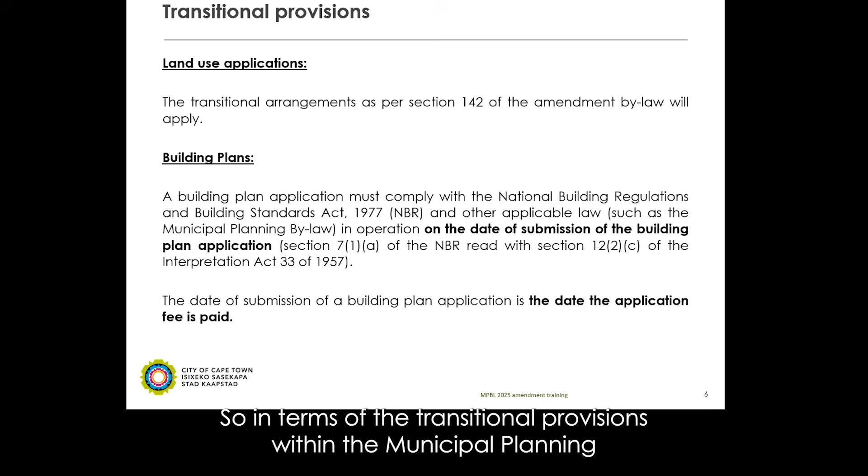So in terms of the transitional provisions within the Municipal Planning Bylaw Amendment, the transitional arrangement for land use applications is as per section 142 of the Amendment Bylaw, and that will apply going forward. With regards to building plans, the building plan must comply with the National Building Regulations and building standards and other applicable law on the date of submission of the building plan application. The date of payment of the building plan is the date considered the date of submission, and the law applicable on the date of payment is the law that will apply to the run of the building plan application.

Following on from this, there are a few iterations of how that can proceed. A building plan application submitted before the amendment of the Municipal Planning Bylaw, which will come into full effect on the 1st of October, must comply with the pre-amendment provisions of the bylaw, even if the building plan application is decided after the amendment comes into effect. So if you submitted before the 1st of October, the bylaw applicable at that time will be in effect on that building plan, even if it's decided after the 1st of October.

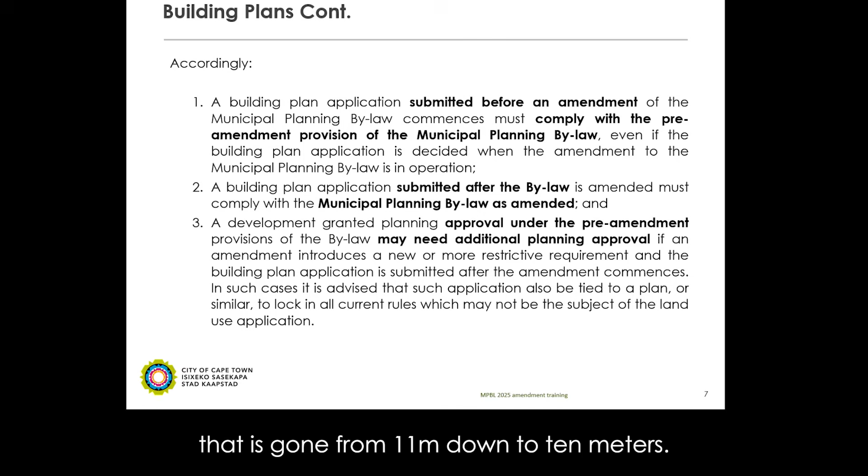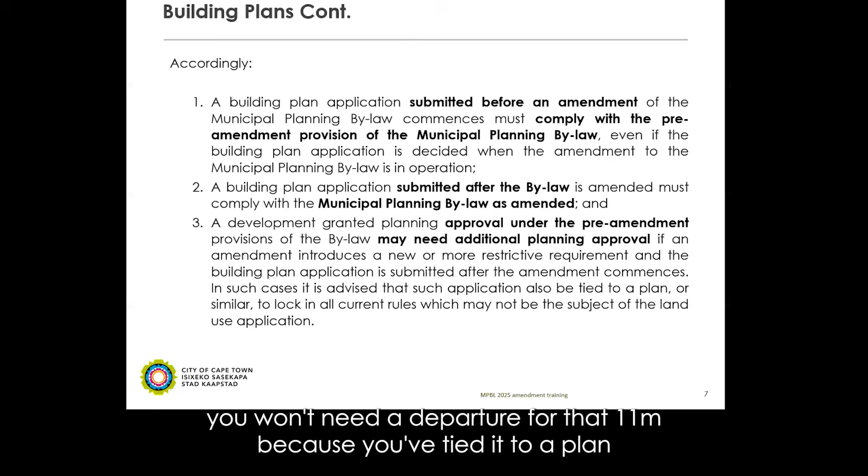A good example, as we will speak to later, is one of the development rules which has changed: our residential one height, which has gone from 11 meters down to 10 meters. So if you have a land use application approved before the 1st of October with a height of 11 meters, and we tie it to a plan showing 11 meters, you will not need a departure when your building plan is submitted, even though the new development rules after the 1st of October go down to 10 meters. Because you've tied it to a land use plan, all the development rules tied to that plan will then apply going forward with the building plan.

So moving on just to the objectives of the amendments.

In an overarching look at the amendments, the objectives include alignment with applicable approved city policies and strategies which have changed over the 5-year time, as well as since the last amendment.

A big direction that we took with this bylaw amendment was avoiding duplication of processes. This can be seen in things such as events, filming, and informal trading, where there's duplicated municipal processes which we then just try to remove.

Expanding and recognizing economic opportunities can be seen through the expansion of our TR2 zone, and expansion of renewable energy opportunities. There's been a long list of new land use types included in this bylaw, improved emergency housing - we've made it clear that this is now temporary disaster housing provisions - incorporation of affordable rental flats as a land use category, new incentive overlay zones, a new rectification chapter, and new impoundment powers for movable and immovable properties, including vehicles, for illegal work.

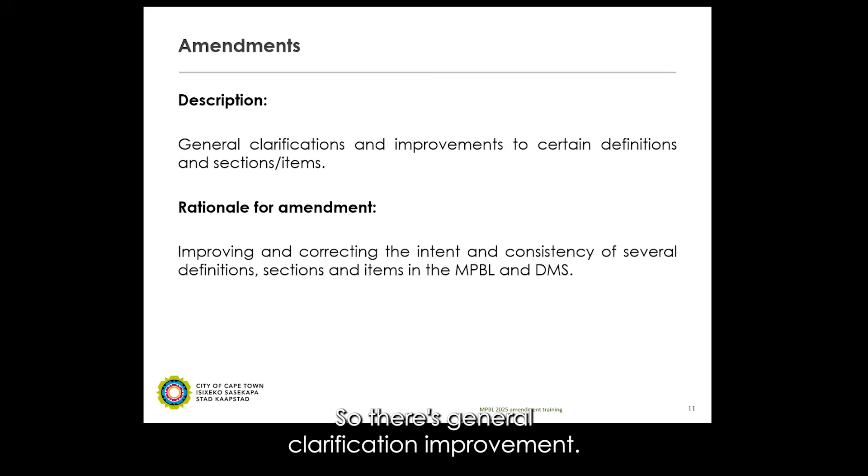So just going through each one of those, the rationale behind them. There's general clarification and improvement to certain definitions. The rationale for these was just improving and correcting the intent and consistency of the definitions.

The improved emergency housing, or now temporary disaster housing provision - the rationale for this amendment was that in disasters like a major fire or flood, the city is obligated to create temporary housing on land that can be zoned for such purposes. The intention of this amendment was to make sure that it must be temporary in nature.

The incorporation of affordable rental flats - this is a recognition of a phenomenon that is currently happening around the city, and now we are trying to control this phenomenon in a manner that can assist the living conditions of the people using it.

Just to highlight again, those components are of course already effective now. The affordable rental flats from the 1st of September.

Enabling economic opportunities, as I said, creating and recognizing new definitions, promoting economic development in terms of land use possibilities. One of the big ones was outdoor restaurant seating within our TR2 zone.

Eliminating duplication of processes - eliminating the need for land use applications in full in instances where the city already has mechanisms in place to regulate these functions. As I said, filming, events, and informal trading all have their own separate processes and bylaws. There's no need to duplicate it, so we found that removing it from the land use section is an effective way to make it a more efficient process for these phenomena.

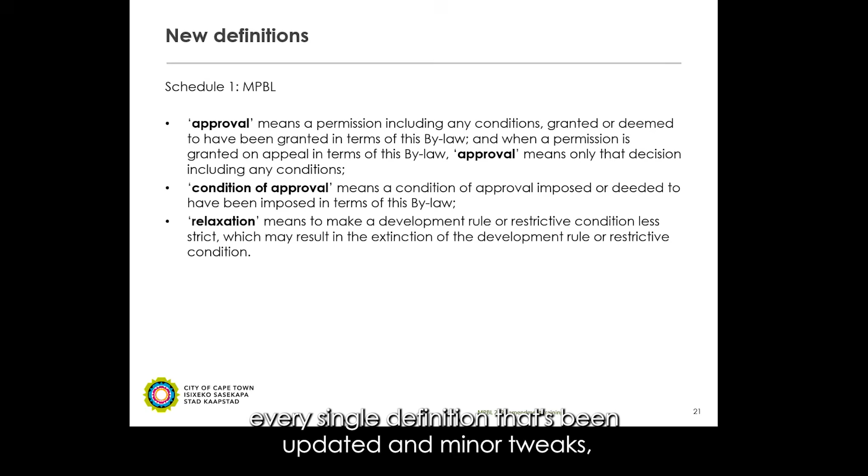Thanks Scott. Greg, if you can maybe please proceed. So just looking at our new and updated definitions - firstly, we're not going through every single definition that's been updated with minor tweaks, but these are just standout definitions that have been completely included and brought into the bylaw, which could be of use to yourselves or just for information purposes. So in Schedule 1 of the bylaw, we've included 3 new definitions: approval, condition of approval, and relaxation.

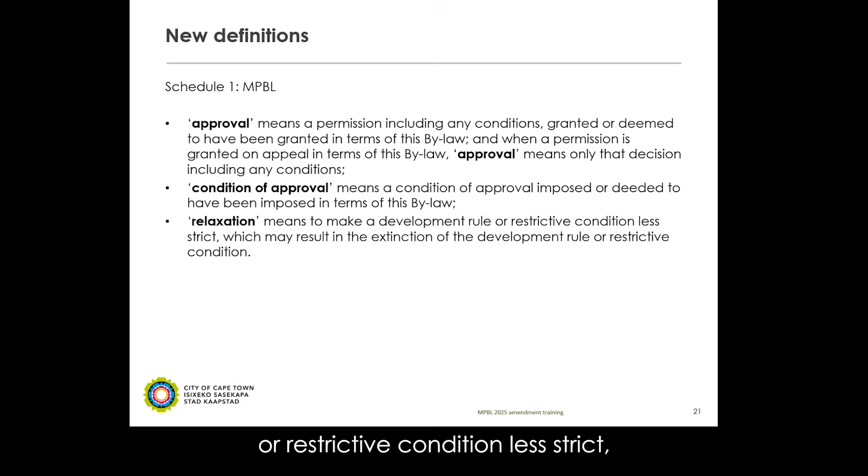A big one being relaxation means to make a development rule or restrictive condition less strict, which may result in the extinction of the development rule or restrictive condition. Obviously previously not defined, and now is a definition within the bylaw.

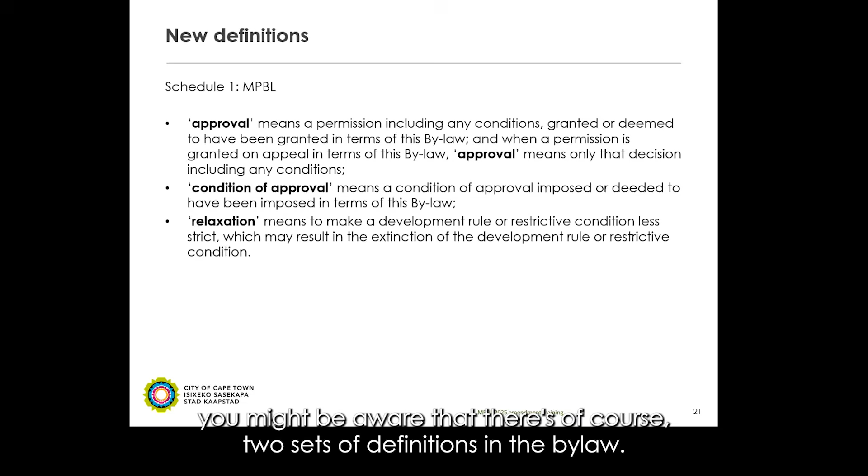Scott, is there anything you want to add to that? Yeah, maybe just to confirm, there are many other changes. When we say Schedule 1 bylaw, those three definitions on the screen, you might be aware that there are two sets of definitions in the bylaw - firstly at the beginning, and then before the development management schemes start as well. So those on the screen relate to the first set.

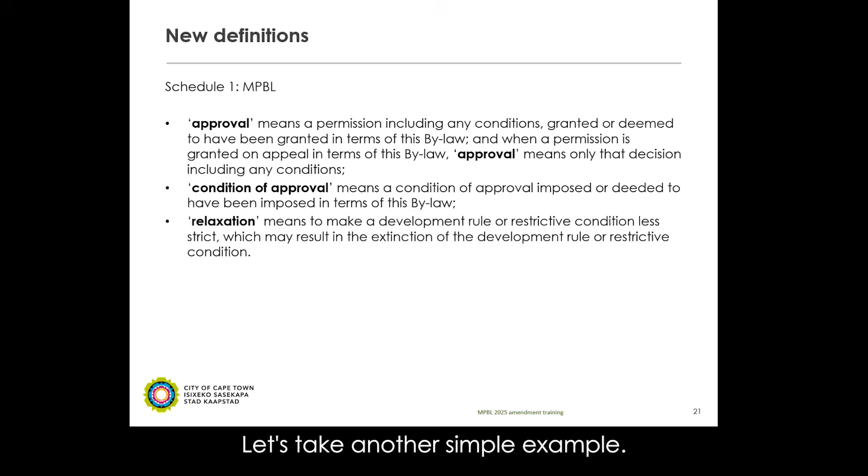As Greg mentioned, now relaxation, this is quite an interesting one, is now defined. You might also be aware that previously the city's advice was whenever a title deed, for example, allowed a condition to be relaxed, the city's position was that if that relaxation results in that condition not existing anymore - let's take another simple example, say there was a building line relaxation from 3 meters to 0 meters - then the city's position was that that could not be done through the relaxation process because the interpretation was that relax means it must still exist afterwards in some way or form.

But now there is this particular definition which clearly states that a relaxation may result in that rule not being there anymore, in effect. So one can then use the relaxation option as of the application types whenever the title deed allows for that, basically.

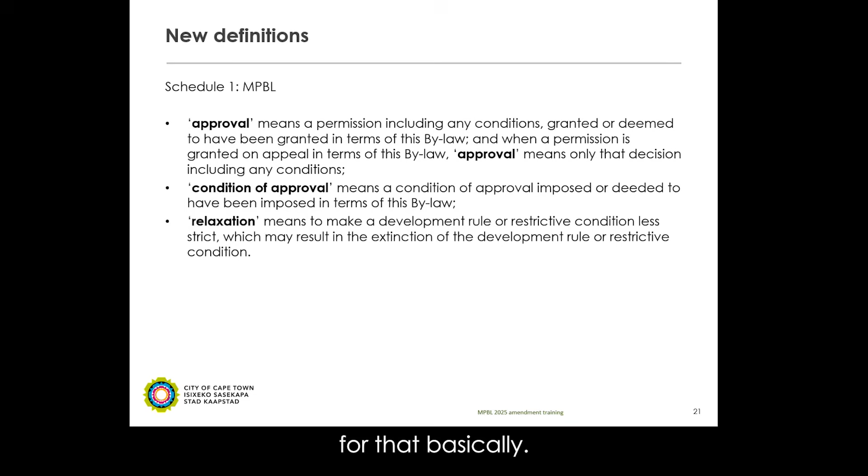Yeah, no, that's all. Thanks, Greg. Thanks, Schalk.

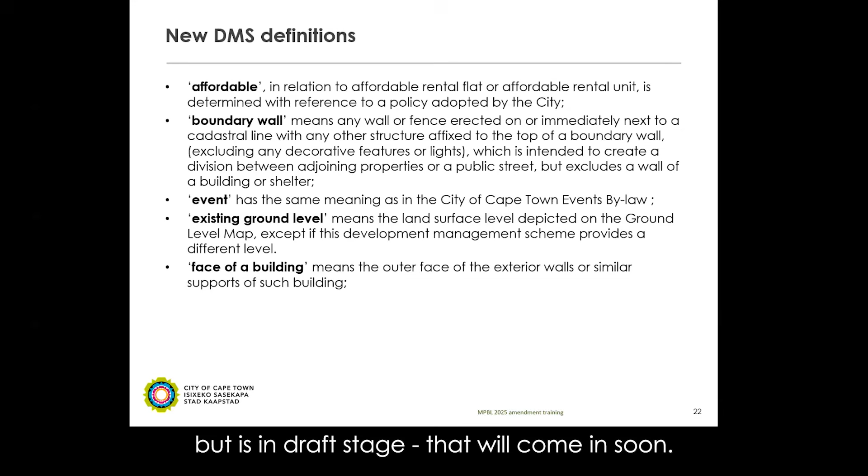So moving from the Schedule 1, we've got new DMS definitions. We've got affordable, which is a new definition in relation to affordable rental flat and affordable rental unit, and is determined with reference to a policy that is to be adopted by council. The policy has not been adopted at this point in time, but is in draft stage. That will come in soon.

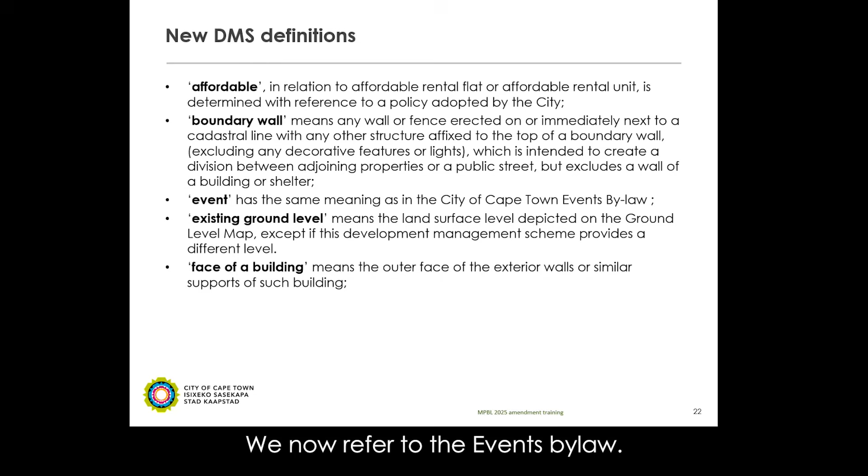We've changed our definition of a boundary wall with a few amendments. We've included event within the definition as per the removal of the duplication of process, making events more of a primary right - we now refer to the events bylaw. There have been changes to our existing ground level definition; the full definition has been moved from definitions to a provision that will be spoken about shortly. And then we included face of a building definitions.

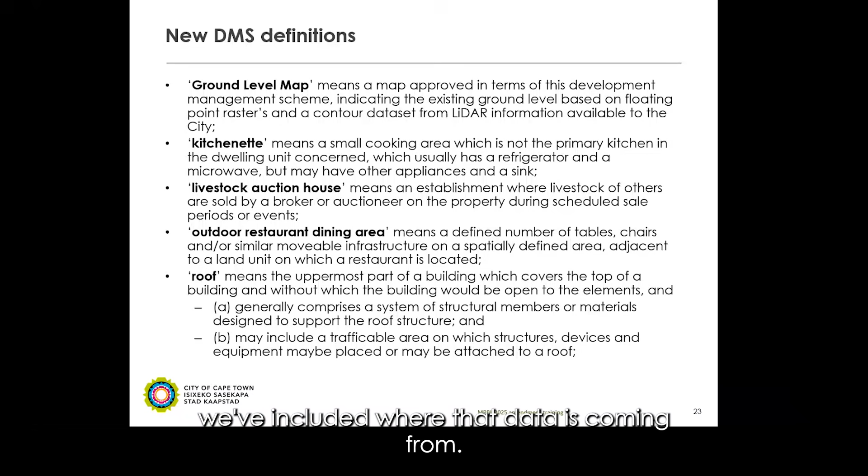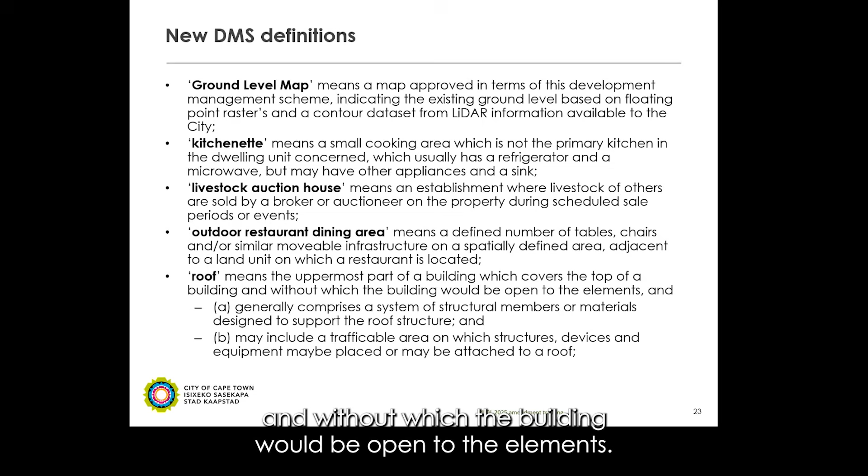For the further definitions - ground level map, we've just added the data set. From LiDAR information available to the city, we've included where that data has come from. A new definition of kitchenette has come in, and then a few use types: livestock auction house, outdoor dining area, and a big one, roof, which means the uppermost part of a building which covers the top of a building, and without which the building would be open to the elements. There are two subsections to this, which generally comprise a system of structural members or materials designed to support the roof, and may include a trafficable area on which structures, devices, and equipment may be placed.

Roof has never been defined in the DMS, but now there is a definition for this. Some of you might be aware of the Epstein judgment a few years ago, where it was ruled that a roof may not be used for any trafficable purposes. The inclusion of a definition for this does allow for this now, so the judgment is then not in effect anymore for that particular aspect.

Greg will touch on it later on, but all of this must also be read in context. There's a new measurement to height of a building, so we'll touch on it later, but anything that you may put on a roof as part of that trafficable area must, of course, then be within your height limitation.

I just want to quickly mention, a kitchenette is also an interesting one, and we've had a few questions on that already. So kitchenette is now defined in the DMS. Previously it wasn't, so you were allowed to have one kitchen per dwelling. By having a definition for kitchenette now - and it's self-explanatory on the screen there what it is - it opens the door to have more than your main kitchen, in terms of smaller cooking areas, in the entertainment area for example. But just some brief comments on that, we'll take comments or questions on that later on as well. Thanks, Greg. Thanks, Schalk.

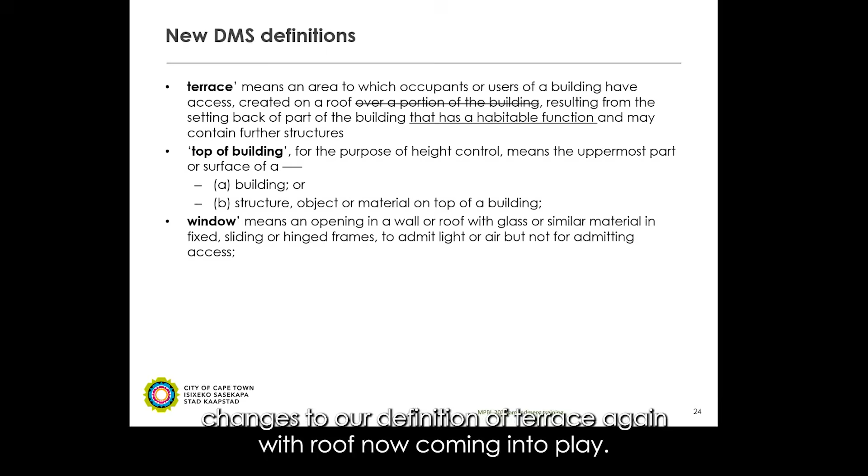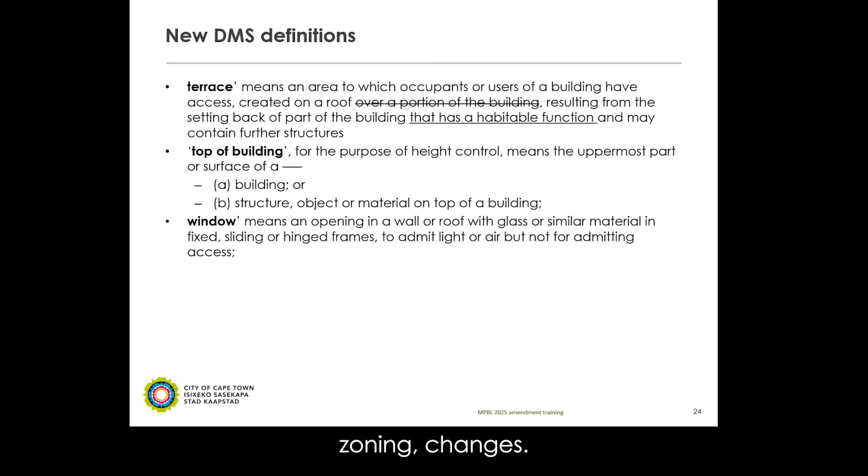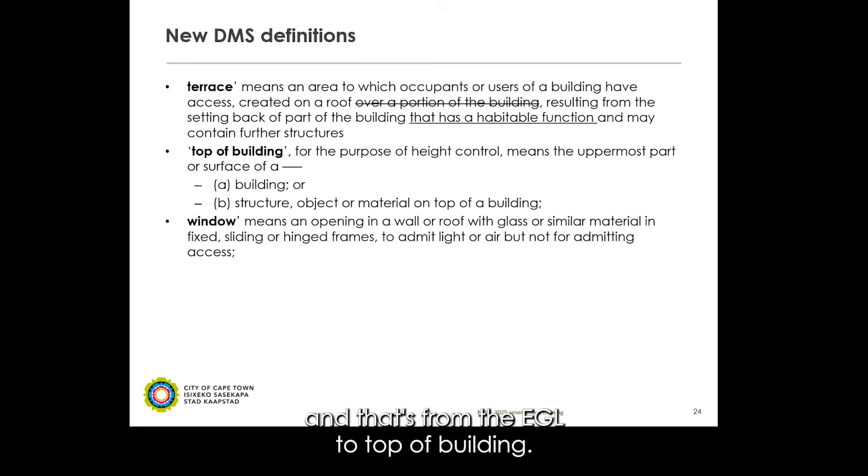Just to expand a little bit on the top of building definition now - as you may be aware, wall plate has been deleted with the amendment bylaw. So previously in some zonings, particularly the residential zonings, you had two height measurements from your EGL: one from EGL to wall plate and the other to top of roof. This has now been deleted. There is now only one height measurement across all zonings, and that's from the EGL to top of building. We'll speak a little bit more on that later.

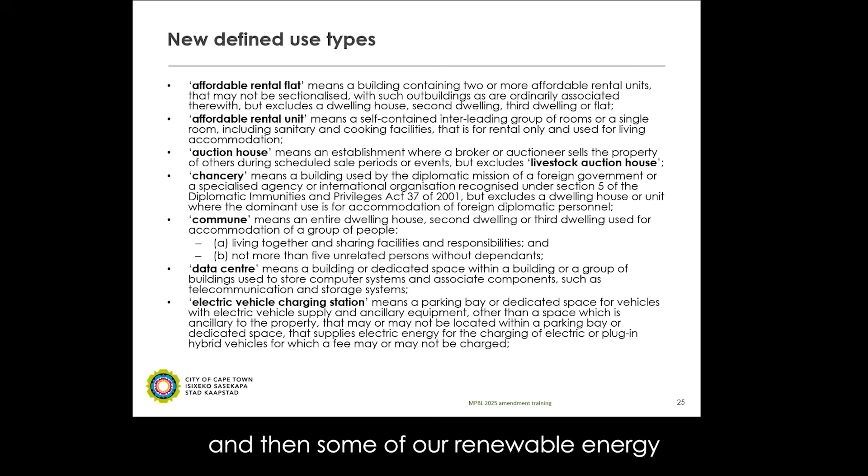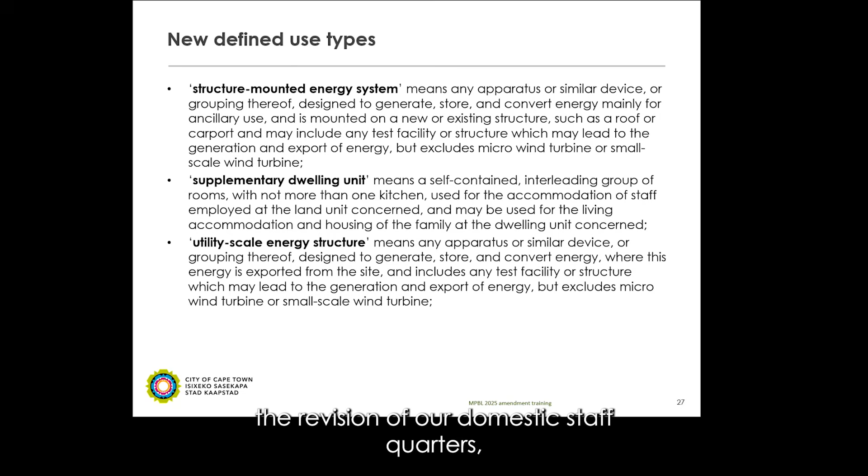Just some new definitions relating to our new defined use types. Affordable rental flats and affordable rental units have been spoken about quite a bit. Those are now defined: auction house, chancery, commune, data center, and some of our renewable energy inclusions include electric vehicle charging stations, ground-mounted energy systems, micro wind turbines, small-scale animal care centers, small-scale wind turbines, structure-mounted energy systems, and then supplementary dwelling unit. Supplementary dwelling unit is just a revision of our domestic staff quarters, with domestic staff quarters being replaced by supplementary dwelling unit, and also our utility scale energy structures.

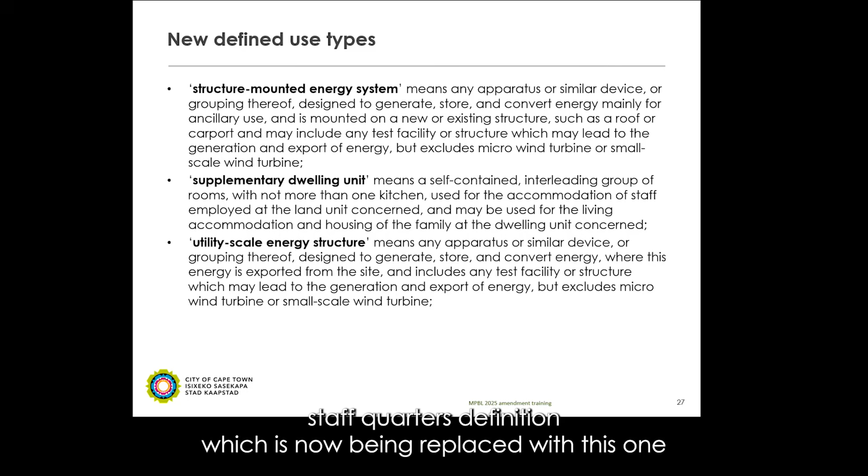I just want to confirm to everybody again, to make sure everyone is on the same page: a supplementary dwelling unit is not a fourth dwelling unit in the residential zonings, as an example, and there might have been some confusion on that. As Greg has highlighted, it is still the previous domestic staff quarters definition, which has now been replaced with this one, and all the requirements are still the same as domestic staff quarters. So just to confirm, it's not an extra dwelling unit - it's basically a new word and some new provisions relating to that.

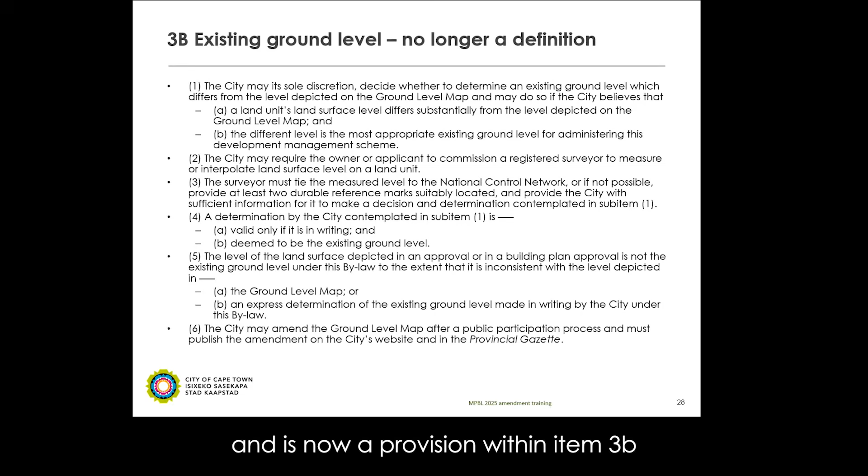Thank you, Schalk. And then, as we spoke about earlier, we're removing existing ground level as a definition, and it is now a provision within item 3B or section 3B.

So I think we're going to move into the zoning changes, and this is where we will discuss all the additional use rights, etc. Roland, just a heads up - as we will speak about now, it's no longer SR1 from the 1st of October, it'll be called R1. So just a note there.

So we're moving into the zoning changes. Our first one being residential zone 1, conventional housing. The big change to this is obviously a name change - no longer single residential 1 or single residential zoning, but now referred to as residential zoning 1. This has come with the changes over the years including second dwellings and third dwellings. It was questioned why it was referring to single residential, so we've removed the 'single' and it's now residential zoning 1.

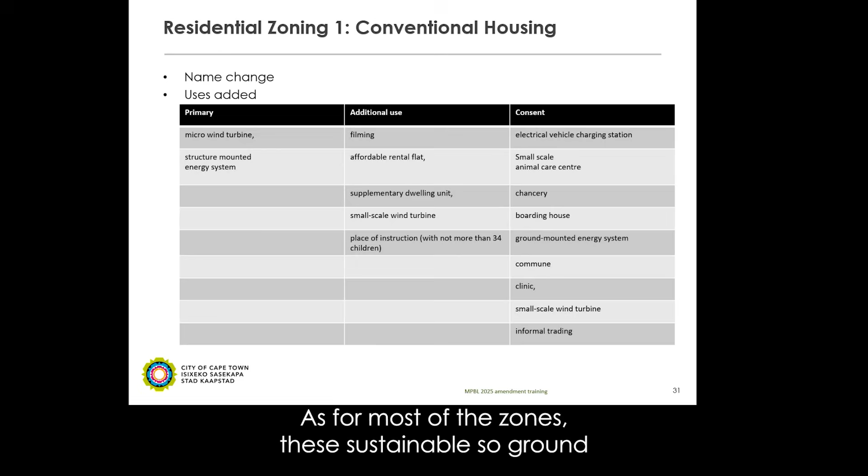And with that, you can see the table showing all the uses that have been added to the zone. This will be the format for all the zoning - a quick brief overview of the primary additions, additional use right additions, and consent use additions. In residential zoning 1, affordable rental flat has been included, supplementary dwelling unit under additional use right, and a big one is place of instruction - place of instruction being an ECD for 34 kids or less is an additional use right. Additional use rights are a use right you can take up if you comply with conditions, which we'll get to shortly. On the consent use side, you'll see our sustainable energy uses have been included - ground-mounted energy, small-scale wind turbines, etc., as per most of the zones.

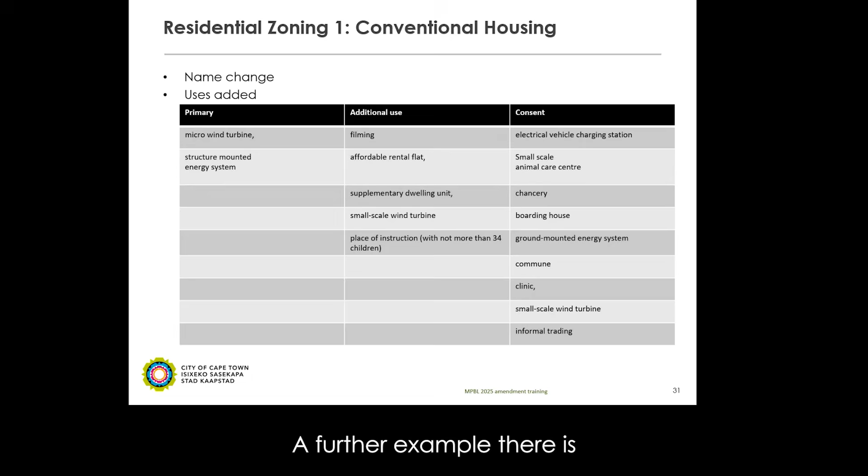Just a quick note - as Greg has mentioned, we will be showing what uses have been added as examples to zonings, but please note there have been many definition tweaks and amendments. So if you see a use added here, make sure to also follow up on those current uses which may be allowed in a zoning, because there might be some sub-uses added to that particular current use as well. This is where a particular use on its own, as defined, has now been added - it's not necessarily particular to residential zoning 1. For example, where business premises is a primary use, we won't necessarily show business premises on the slide, but if you go and look at the definition of business premises, there are some further tweaks added to that definition as well.

Moving on from the uses, we're looking at the development rules for residential zoning 1. As we've spoken about earlier, this is a big change to all of our, or mainly to our residential zones.

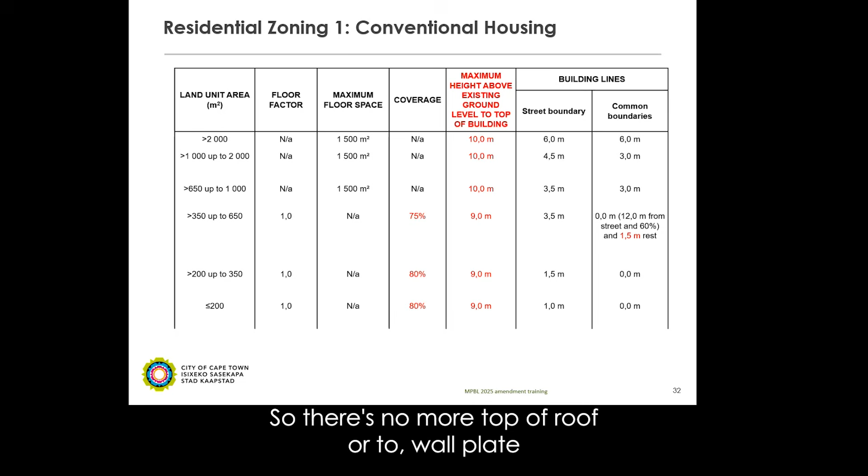There's no longer a wall plate within the DMS, so it is now one height for determining the maximum height above existing ground level, and that is to the top of a building. There's no more top of roof or wall plate distinction, where it used to be 11 meters to top of roof and 9 meters to wall plate. It is now a single measurement, to top of building.

As you can see, all the changes in red are what has been amended. All of the heights have been amended to include one single height limit, with coverage being included in a few of the zone or land unit areas.

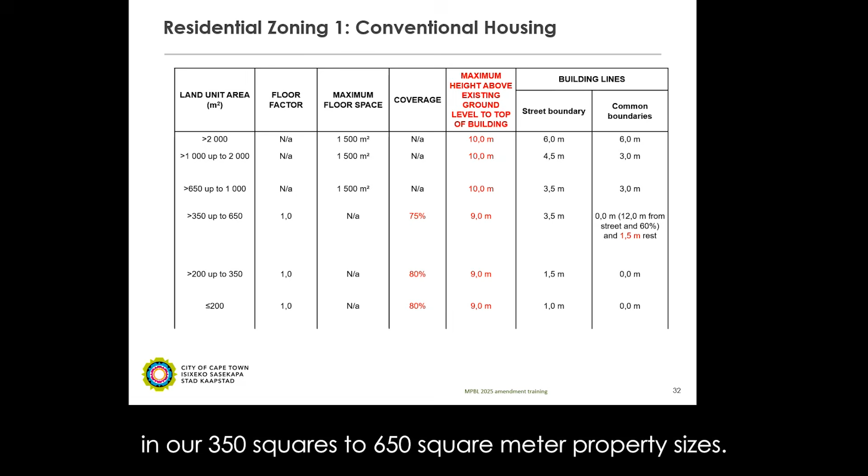Also, in our 350 square meter to 650 square meter property sizes. We have taken it from 3 meters after the 60% down to 1.5.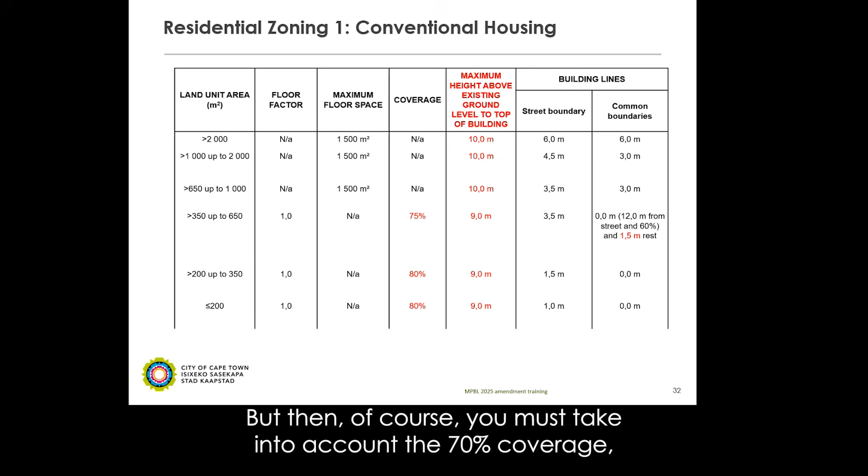Just a further note there: for that particular use size category, there's now the addition of a coverage requirement. So it's a reduction from 3 to 1.5, as mentioned, past the 12 meters, but then you must take into account the 75% coverage issue.

A notable mention within the development management scheme under residential 1 is item 22C3 or III. Notwithstanding subparagraph 2, within the first 12 meters along a common boundary measured perpendicular from the street, there's been a deletion, and where a building is not set back from such common boundary, the height is determined in accordance with the table.

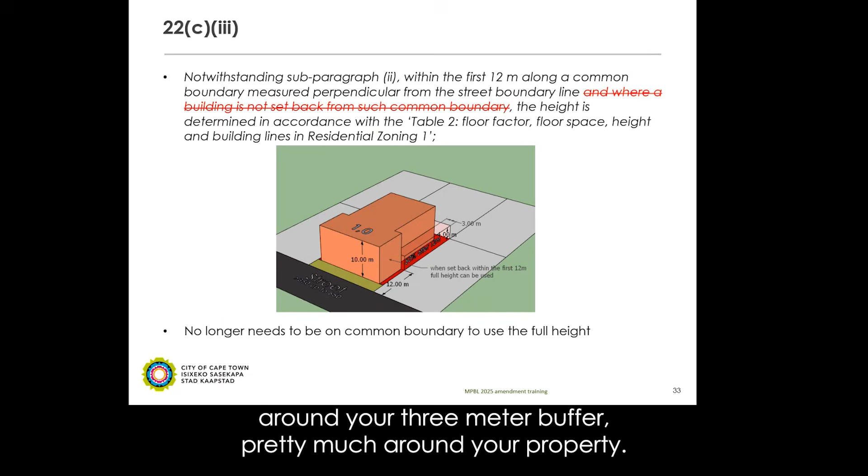Previously, if you set back your structure within the first 12 meters, you had to comply with the 4-meter height restriction around your 3-meter buffer, pretty much around your property. The change now says if you set back within the first 12 meters, you can still use your full height. So as shown in the diagram, within the first 12, this structure is set back half a meter, and you can still use your full 10-meter height. You no longer need to comply with the 4-meter height restriction.

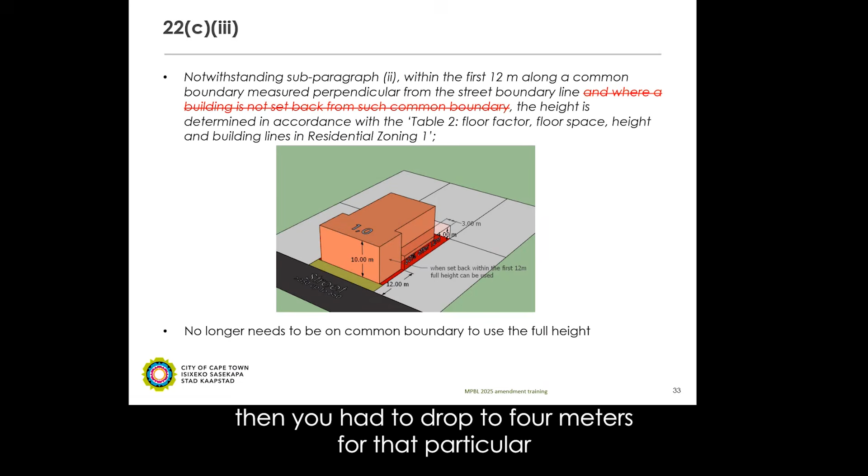This, of course, is only for that first 12 meters. Beyond the first 12, you'll still have to comply with the further height requirement. Previously, when your building was on the boundary, you could go the full height, but when it was set back in that 3-meter zone from the common boundary, you had to drop to 4 meters for that particular 3 meters, then go back to full height after that. So this simplifies the rule, meaning that if your building is set back a little bit, you can still use the full height.

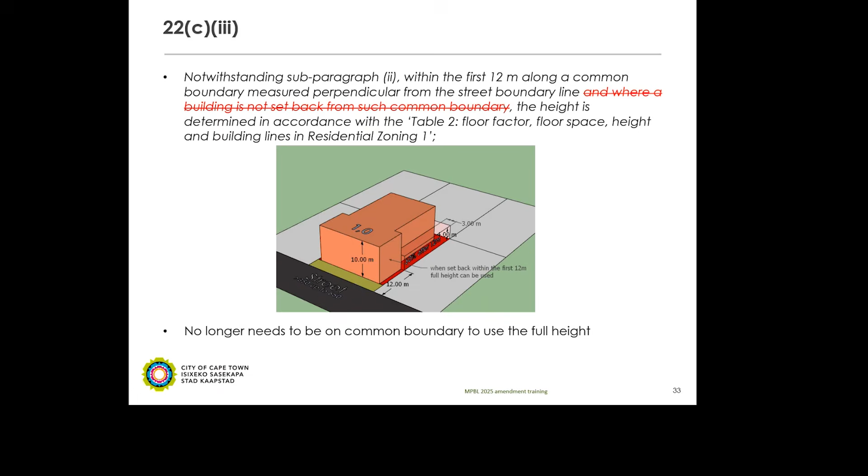Just please keep in mind any further requirements that may be applicable, such as the window and door placements and those kinds of things as well. Thanks, Kalk.

Just a note on the new additional use rights within residential 1. 25C speaks to your supplementary dwelling unit, which is, as we said, the previously mentioned domestic staff quarters. This is just a very brief overview, but within the condition it speaks to a limited size, and that you can only have one.

25D speaks to our affordable rental flats additional use right. This speaks to it only being allowed within the areas permitted as per the map. You can only have it where there's no second, third, or supplementary dwelling unit. So that refers to the questions asked earlier: if you have your main dwelling unit and a second dwelling unit, can you still have the affordable rental flats? No.

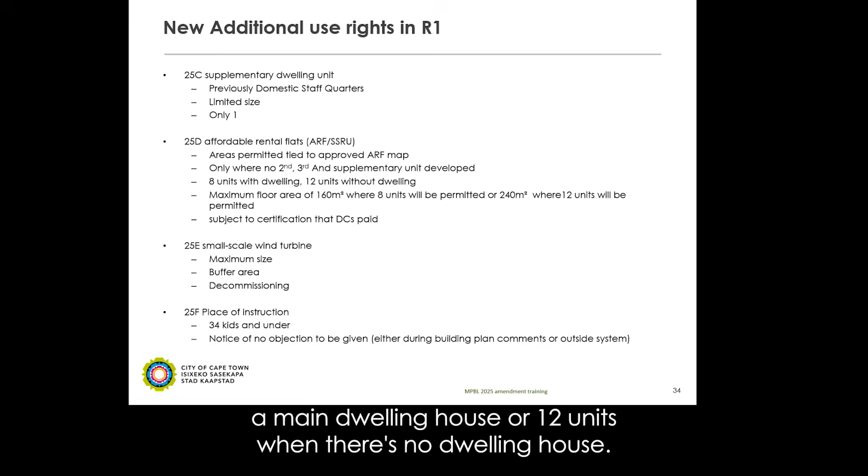The conditions also speak to having 8 affordable rental units with the main dwelling house, or 12 units when there's no dwelling house. It speaks to a maximum floor area of 160 square meters where 8 units are permitted, or 240 when you have 12. These are all subject to certification that development contributions have been paid. We will go through these in more detail, and we will show you the map.

25E speaks to the small scale wind turbines. It speaks to the conditions, the maximum size, buffer area, and decommissioning of the wind turbine when no longer needed. And 25F speaks to the place of instruction, speaks to you can have it when it's 34 kids and below.

It speaks to hours of operation, etc. And a big one is that a notice of no objection must still be signed when taking up this additional use right. So if that additional use right wants to be taken up, no objection letters will be given to the owner who wants to take up that additional use right, and he or she needs to go to the surrounding neighbors with the no objection letter stating that they wish to take up this additional use right, and that the neighbors don't object to it. If the neighbors object to it, they cannot take that additional use right up.

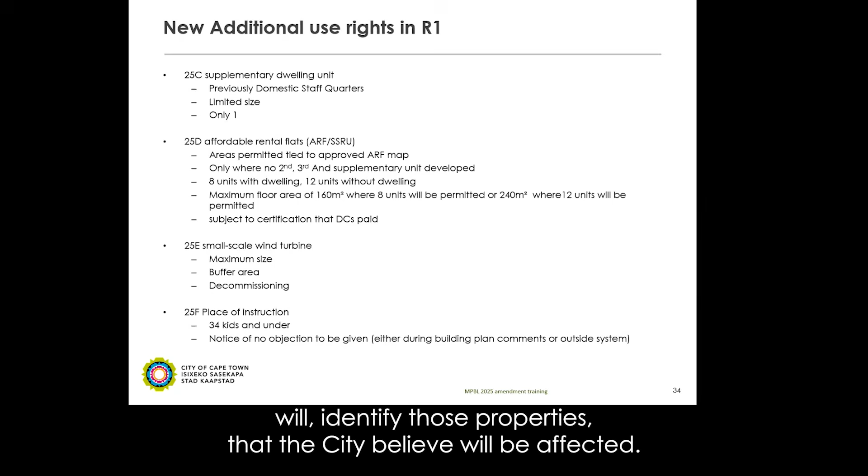They will need to submit a formal land use application. Maybe just to elaborate a little further on that one, the notice of no objection is a determination that must be made by the city as to who the potentially affected persons are. As with other similar types of applications in the past where notices of no objection might be applicable, the city will identify those properties that the city believes will be affected, and then the owner needs to get those no objection letters from those particular owners. If they can't do that, then of course the additional use right falls away.

There was an IM question, I think, John. Additional use rights are still subject to the main use of a dwelling and undertaken by the occupant of the property, meaning it's only permitted if used as a dwelling as well. So yeah, there are these further additional use right conditions. For example, the place of instruction one is item 25F, and there are particular conditions there. But all of this must be read with the general additional use rights conditions as well under item 21, where we do say, for example, that it must be mainly residential. There's who might be the operator there, and then the employees, the number of employees, etc. So in short, just to answer your question, it must be read with the general additional use right conditions as well.

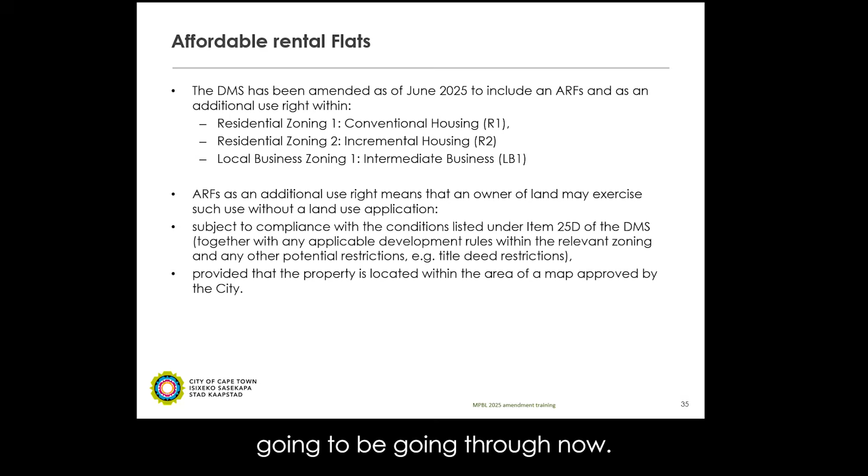So just coming back to the presentation, specifically with regards to affordable rental flats, as we've said, it's been included now in residential zone 1, residential zone 2, and local business zoning 1. The affordable rental flats is an additional use right, and the owner of the land may exercise it without a land use application, but has to be compliant with the conditions we're going to be going through now, subject to compliance with the conditions listed under 25D, together with the applicable development rules. And then lastly, provided that the property is located within the area of the map approved by the city. We'll also show you that.

So the conditions under 25D: affordable rental flats may only be developed and permitted on a property where a second dwelling, third dwelling, or supplementary dwelling unit has not been developed. This has come up as a question quite a few times. You can have your affordable rental flat where there isn't a second dwelling, third dwelling, or supplementary dwelling unit. An affordable rental flat is only permitted as an additional use right on properties within the map. We'll show you where you can get the map, and which layers need to be turned on. The number of affordable rental units is 8 units when there's a dwelling house on the property, or 12 units when there's no dwelling that exists on the property.

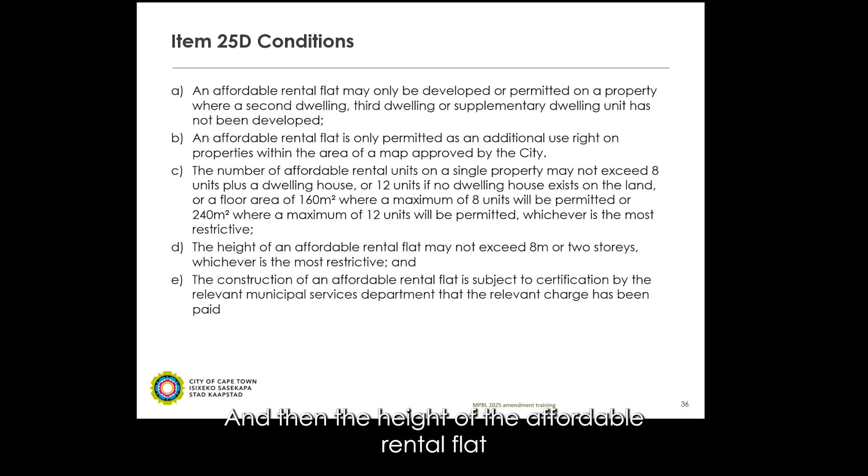Or where the floor area is 160 square meters, with a maximum of 8 units, or 240 square meters for 12 units. And then the height of the affordable rental flat cannot be more than 8 meters, and the construction of the affordable rental flat is subject to certification by the relevant municipal services department that the relevant charge has been paid.

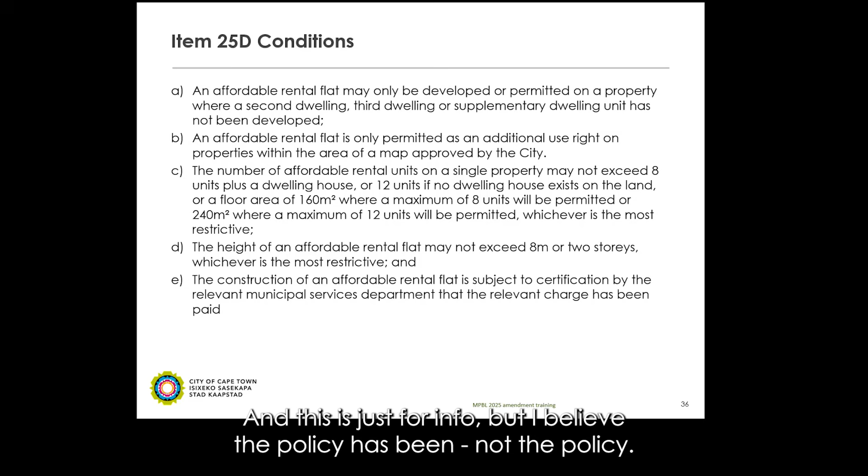Maybe if I can just quickly talk on that last point there. Of course, as with many things, when there's a change in use and increased use, a development charge is possibly applicable. And this is just for info, but I believe the development charge calculator has been updated with a new charge as well for affordable rental flats particularly. I don't have the exact details of what that amount is, but you're free to speak to the relevant engineers whenever you might get to that point.

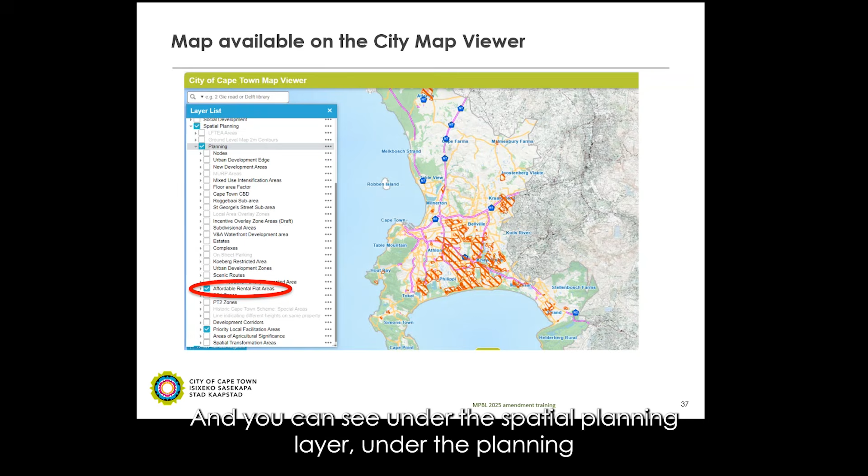Thanks, Scott. And then just so this is our online map viewer. This is on the City of Cape Town website. We can provide a link in the IM to the web page, and you can see under the spatial planning layer, under the planning layer, we've got affordable rental flat areas, and that will show you, if you zoom in on the map, the mapped areas.

Moving on to our residential 2 zoning. This was previously named single residential 2, and now the name has changed to residential zoning 2. This has been a name change.

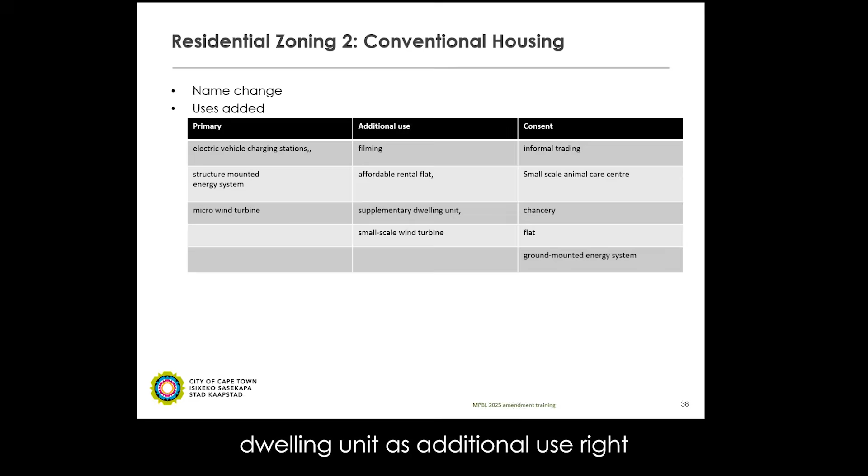Again, changes to your primary, additional, and consent uses. Affordable rental flats and supplementary dwelling unit are additional use rights. Consent uses being informal trading, small scale animal care centre, chancery, flat, and ground mounted energy systems.

Changes to the development rules, the floor factor has increased, and the maximum height changes have all been put in red, because all of the height changes are now measured to top of building, and this is 9 meters for dwelling units and 10 meters for other buildings.

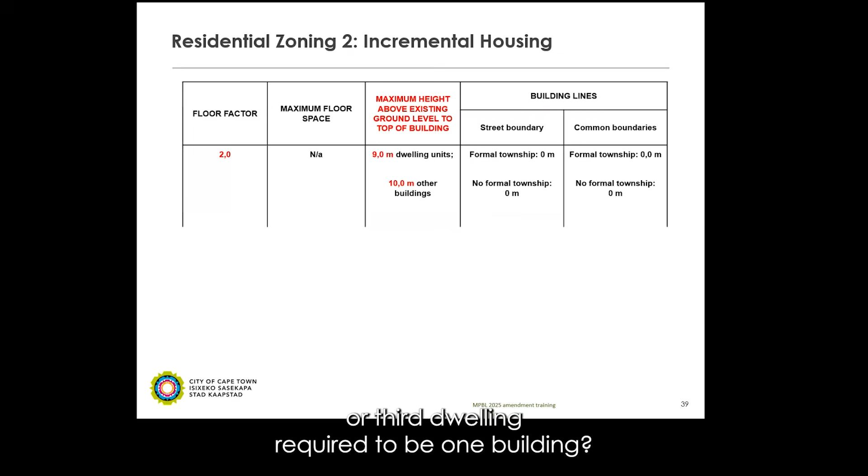We've got a question regarding 25AD: is a second or third dwelling required to be one building? 25AC has been deleted. Sorry, let me just go back to that. You're saying 25A. Give me a second. Is this the conditions regarding the second dwelling?

So questions regarding 25AD. Second dwelling contained within the same building as the main dwelling house must be designed accordingly. So that condition has not changed.

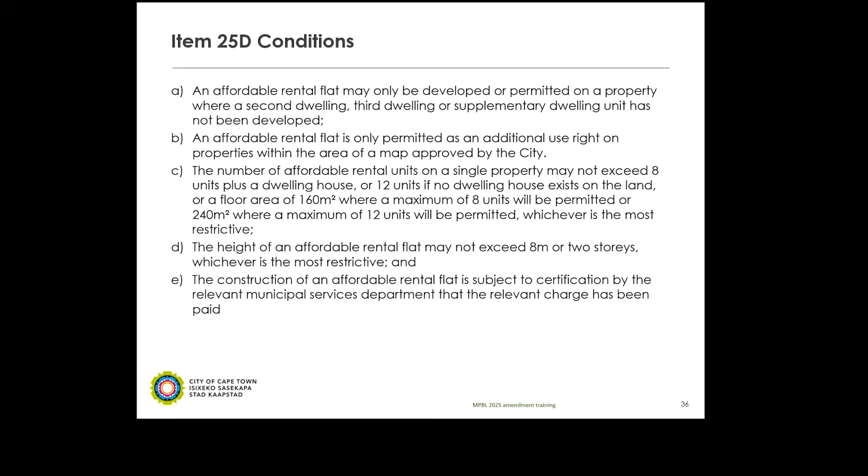C has been deleted. Yeah, James. So I think... C has been deleted, you're correct, and that's to do with height requirements. So any second dwelling will then be subject only to the base zoning requirements in terms of height, and that was when it was a separate structure to the main dwelling. D is still there, and D is just saying whenever it is contained within the same building as the main dwelling, then it must be designed to look as one.

You'll also note that B has also been deleted, and that's to do with the architectural style, where previously that was a formal requirement, but in future that can and will be dealt with at the building plan stage.

Sorry, excuse me, the question is, does a second dwelling have to be, can it be a separate building? Because some plots are very long. Yes, of course. Yes, it can still be a separate building.

Thank you. So it just says now C, as we say, has been deleted, but that was just stating whenever it's a separate building, there's a certain height requirement. So by that deletion, it doesn't mean it cannot be separate anymore. So it can be, yes. Thank you.

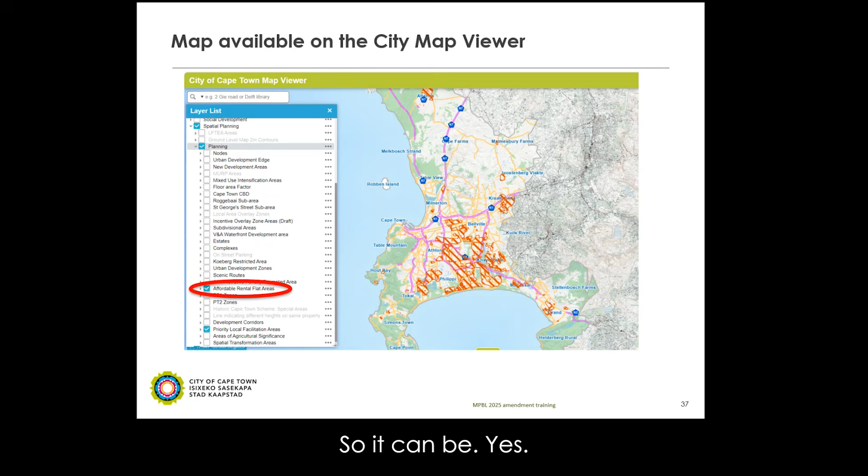Unati has asked the question, can a second dwelling be converted to affordable rental units? Yes. What you will then have to do is show the removal of the second dwelling in the plan, or the conversion of the second dwelling into either 1 or 2, or however many affordable rental units, together with the main dwelling, so a maximum of 8.

Moving on to general residential 1, our group housing. That's just the uses that have been added: sustainable energy systems and supplementary dwelling unit now included in additional use rights, and consents including guest house and chancery. Again, just our change to top of building is now 9 meters. The rest are all the same.

Our general residential 2 to 6 zone: third dwelling coming in as a primary right, with energy systems and home occupation coming as an additional use right, and consents have now included restaurant, guest house, and ground-mounted energy systems. There have been no changes to the development rules within GR 2 to 6.

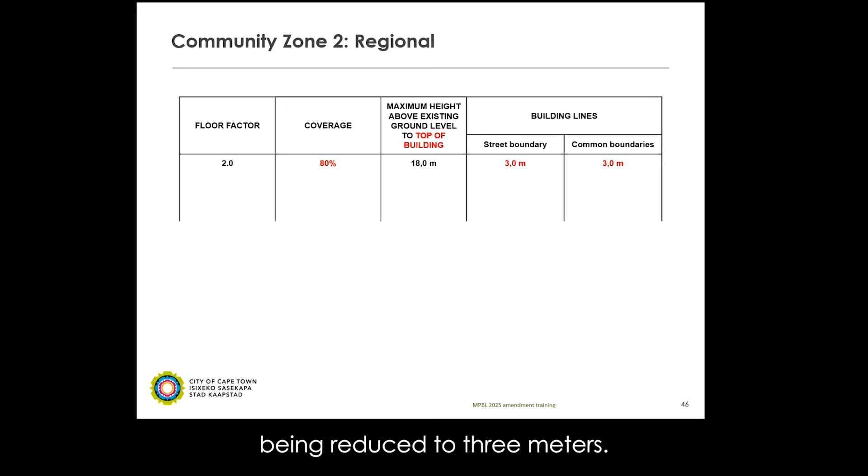Again, changes to coverage and street boundary being reduced to 3 meters. So, Russell, what's the difference between small-scale turbine and micro turbine? We can look at the definitions. Just let us get through the zones, and then we can come back to the definition of those.

In terms of local business, the uses that have been added include filming being a big one within the primary use, affordable rental flats coming in under local business 1, and small scale wind turbines on properties greater than 650 square meters. Restaurants being added to local business 1, and small scale animal centers also being added.

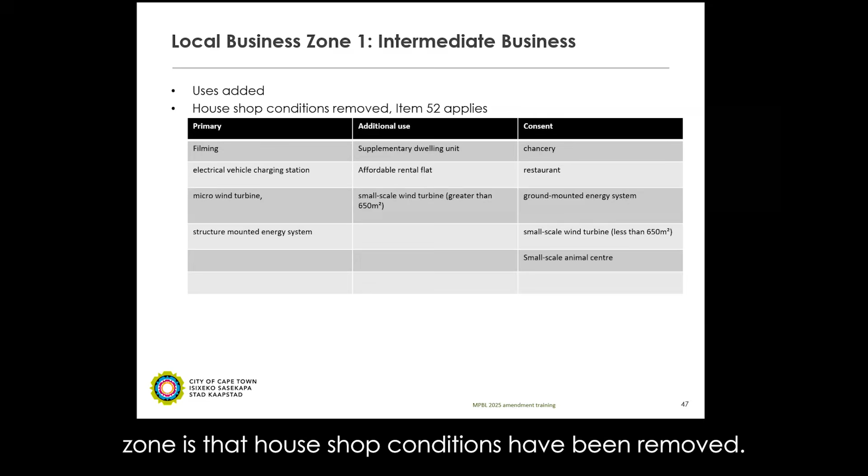One thing to note within local business 1 zone is that house shop conditions have been removed, and item 52 applies within this zone.

The only change within the development rules for local business is the change of height, as shown on the screen. Moving to local business zone 2, filming again becomes a primary right.

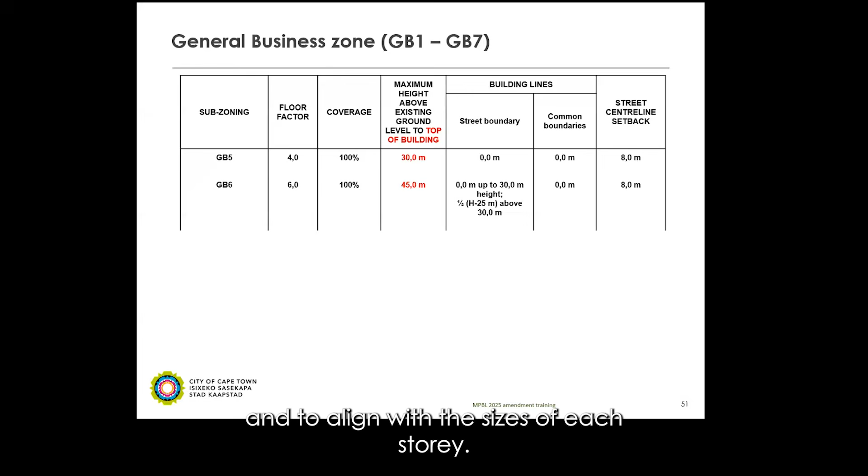No changes to our development rules within local business 2. For the general business zone, general business 1 to 7, chancery being added as a primary right, and energy systems being added across the board. Our changes to general business zone GB 1 to 6 are only in heights, and that's to align with the number of stories and to align with the sizes of each story.

For mixed use zone, again sustainable energy solutions across the board, and small scale animal centers being included as a consent use. The only change to development rules within mixed use zone 1 to 3 is the top of building height change.

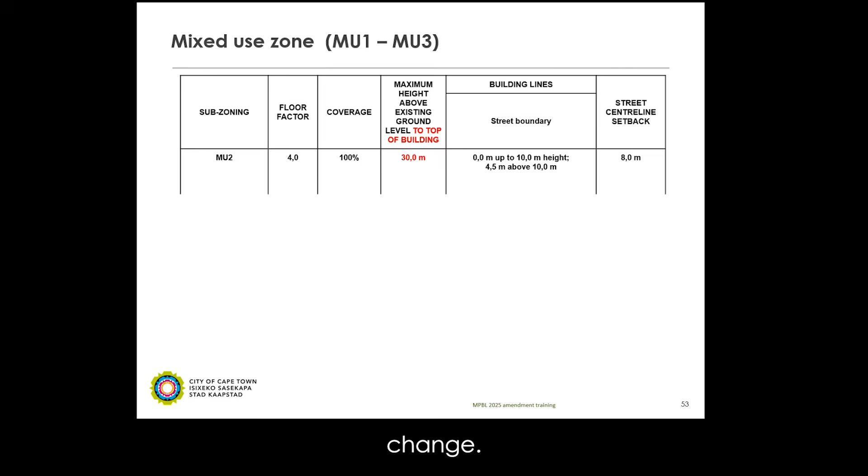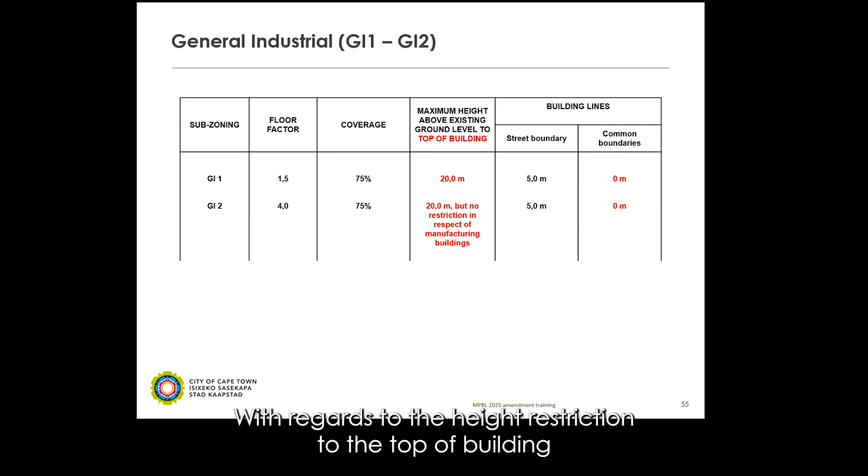For general industrial zone, energy systems across the board are the inclusions to the uses, along with the increase in the height restriction to the top of building, and the common boundaries being reduced to zero.

For risk industry, again energy systems are added across the board, with no changes to the development rules within risk industry. Utility zone, same thing applies.

Filming has been added as a primary right within utility zone, and urban agriculture as a consent use. Within this zone, as in the previous zoning scheme, development rules are controlled by an SDP, so there are no changes to any development rules within this zone.

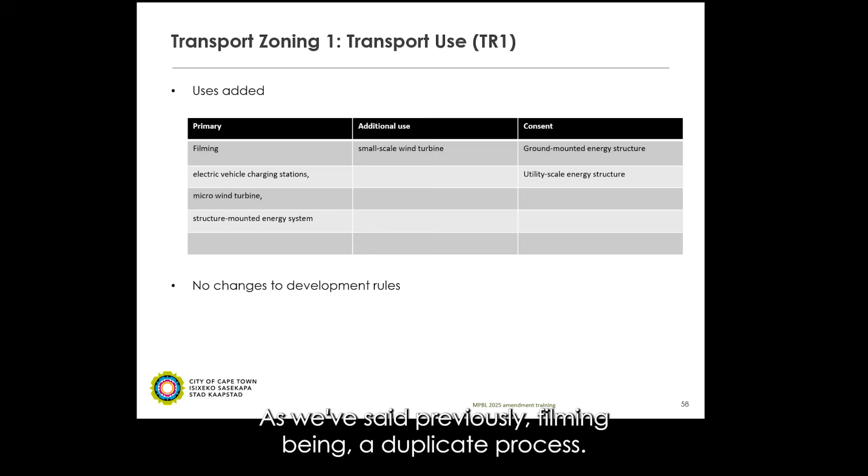Transport Zone 1, filming has been included as a primary right. As we've said previously, filming being a duplicate process, so that's been added as a primary right, along with energy systems across the board. No changes to any development rules within Transport Zoning 1.

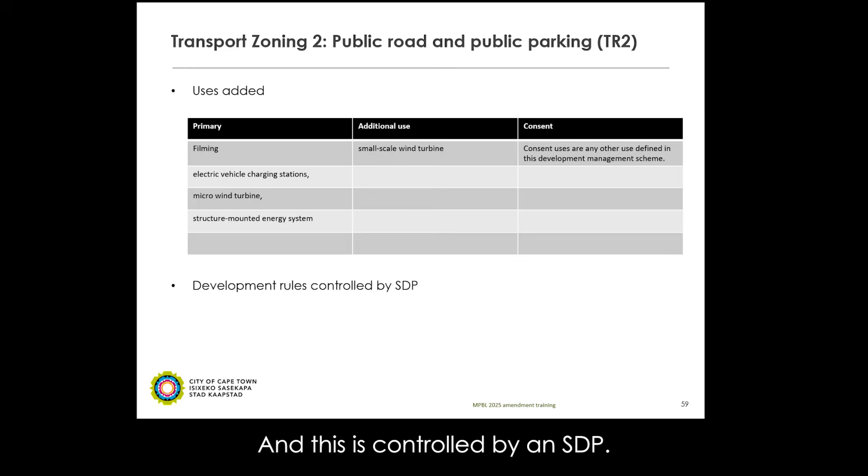Transport Zoning 2, our public road and public parking, filming being a primary right, and consent uses. A big change that's come into Transport Zone 2 is that consent uses are any other uses defined in this development management scheme, so any use defined within the development management scheme can be applied for as a consent use within Transport Zone 2. This is controlled by an SDP, so there are no development rule changes.

Transport Zone 3, our toll road zoning. Just to note, this is not a zone currently in the City of Cape Town, but the uses still have been added as filming and energy systems, again controlled by an SDP, so no changes to any development rules because there aren't any.

Our open space zoning, environmental conservation - filming has been added as a primary right, with energy systems being added as a consent use. This is also controlled by an SDP, so no development rule changes.

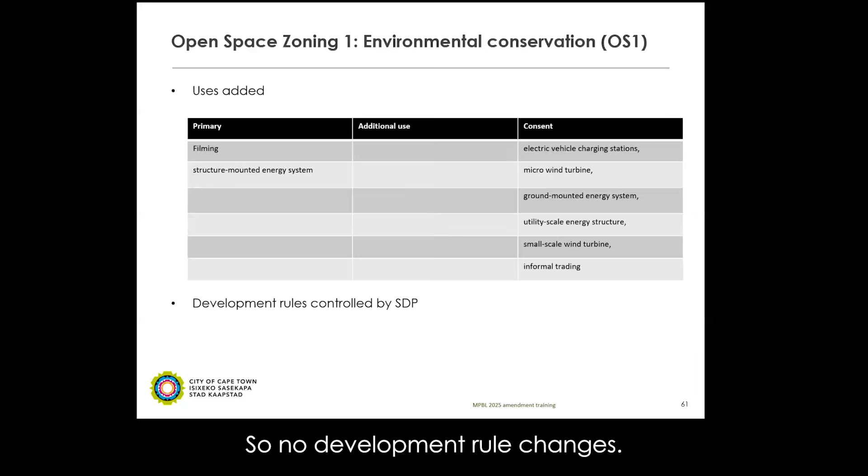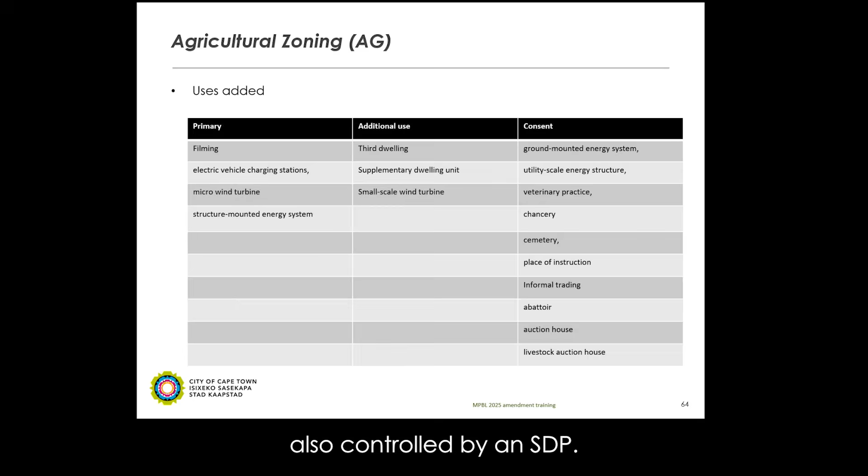Agricultural zoning - there's been quite a list included as consent uses, obviously with energy systems across the board. Supplementary dwelling unit being an additional use right, and then including the auction house, livestock auction house, place of instruction, and a veterinary practice as a consent use.

New additional categories for building lines based on property size have been included for the development rules within agriculture. Previously it was only 20 hectares, then you had a 30-meter building line, but there are smaller properties within the City of Cape Town that are zoned agricultural, so categories have been added per property size, each with a corresponding building line.

So 10 hectares to 20 hectares, you'll have a 15-meter street building line. 2 hectares to 10 hectares, you'll have a 6-meter building line, and under 2 hectares, the residential 1 applicable category will apply. In our rural zone, similar to our agricultural zone, there have been a list of additions to the consent uses. One notable one is a recycling center has been added as a consent use.

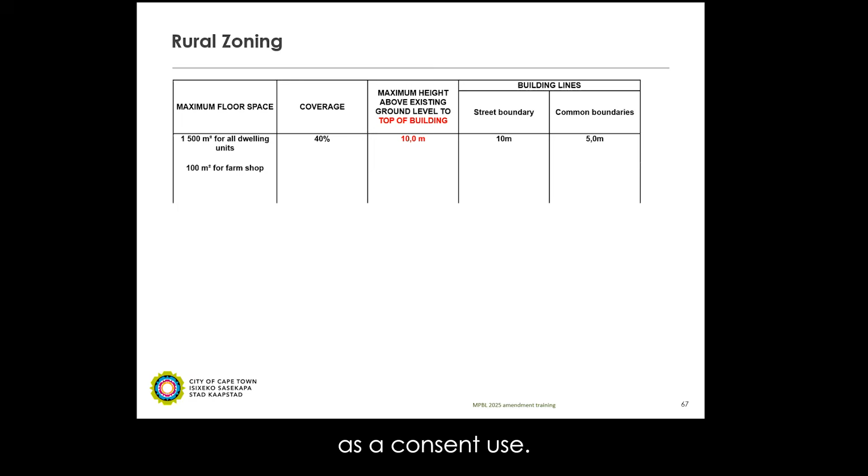And the only change to the development rules is to the top of building. Now on to our general provisions in the bylaw.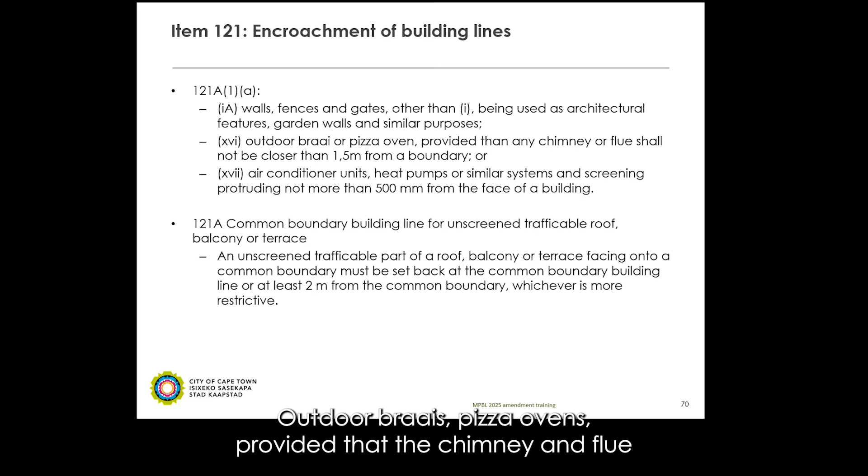The changes made here relate to item 121, encroachment of building lines. There have been a few additions under 121A1A: walls, fences, gates, and other architectural features are now permitted encroachments on the building line. There's also an exclusion for outdoor braais and pizza ovens, provided the chimney and flue are not closer than 1.5 meters, which is also now excluded from complying with the building lines. Air conditioner units, heat pumps, or similar systems have also been included in 121A.

Then 121A covers common boundary building lines for unscreened trafficable roofs, balconies, and terraces. This is a new addition, introduced because trafficable areas are now permitted on roofs, and a new general provision was added to minimize impact on privacy. This relates to trafficable roof areas, terraces, balconies, or decks used for entertainment or general trafficable purposes. An unscreened trafficable part of a roof, balcony, or terrace facing a common boundary must be set back from the common boundary building line, or at least 2 meters from the common boundary, whichever is more restrictive. This addresses the privacy impact of these trafficable areas, and it's something that can now be enforced.

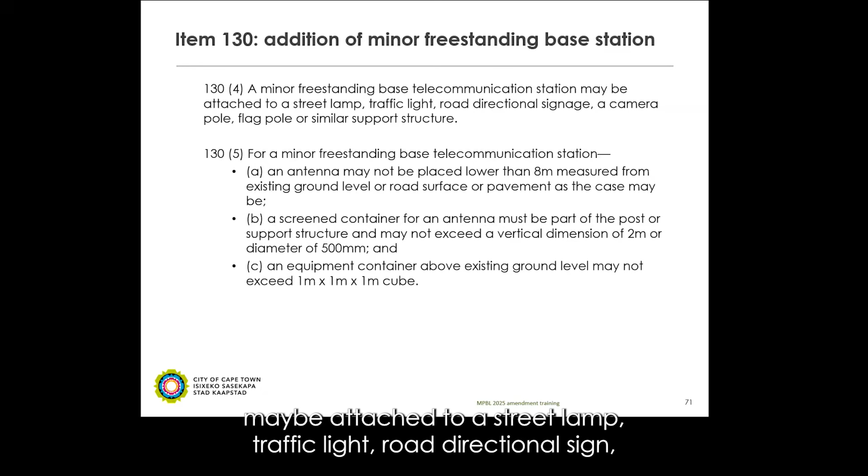Moving on to item 130 under our general provisions, additions of minor freestanding base stations have been included. So 130(4) states a minor freestanding base telecommunication station may be attached to a street lamp, traffic light, road directional sign, camera, flagpole, or similar support structures. Then 130(5) goes to the dimensions and limits on those minor freestanding base stations, under our telecommunication general provision.

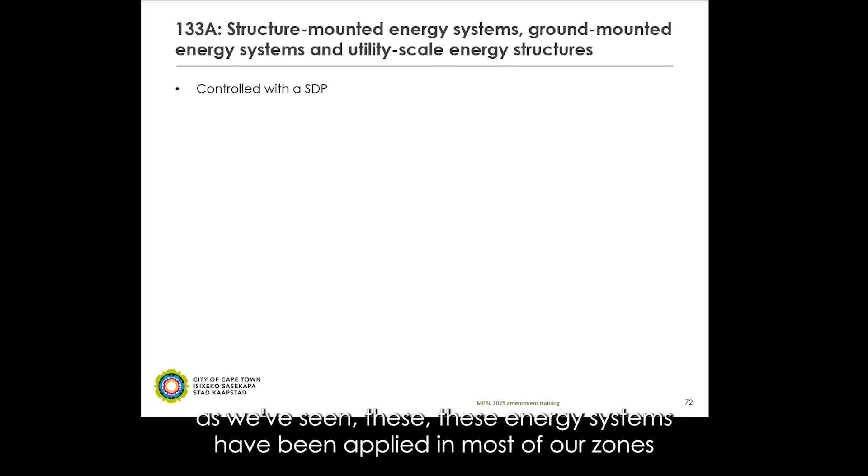133A covers structure-mounted energy systems. As we've seen, these energy systems have been applied in most of our zones, and the general provision accordingly is that they'll be controlled by an SDP. So large-scale solar farms, etc., will all be controlled by SDPs. It's just one of the general provisions.

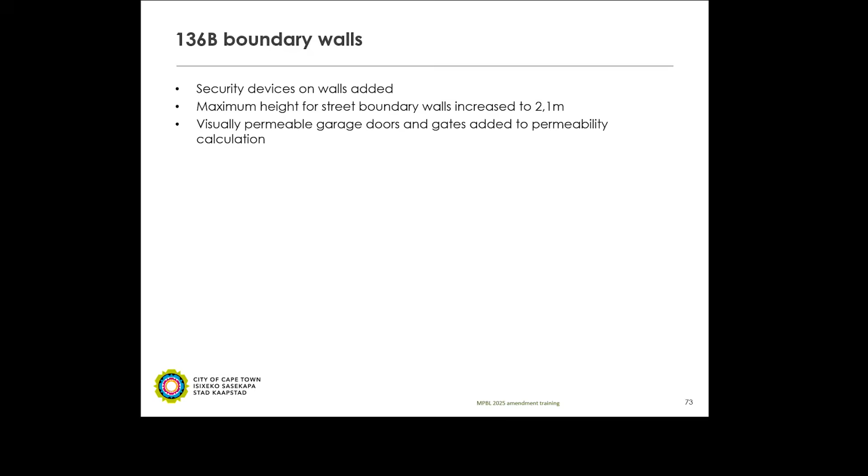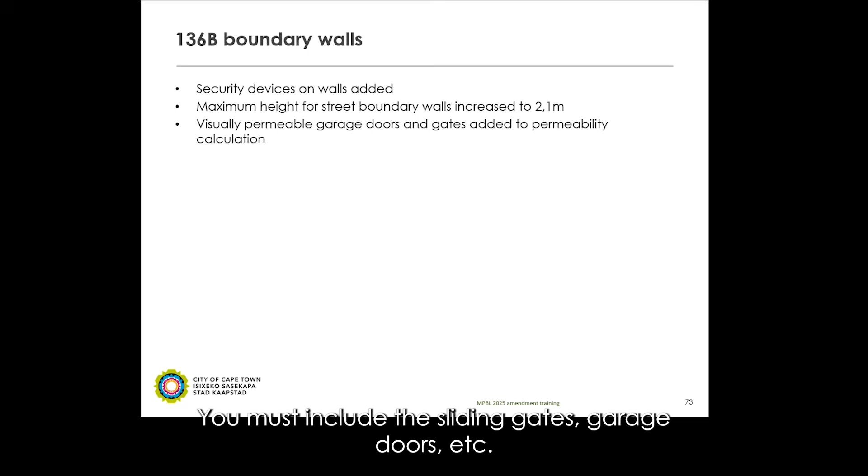136B covers changes to our boundary wall general provision. Security devices on walls, such as electric fences and barbed wiring, have been added. The maximum height from a street boundary has increased to 2.1 meters, to align with prefabricated structures such as clear view fencing. Previously it was 1.8 meters, now increased to 2.1 to align with these prefabricated structures. Visually permeable garage doors and gates have also been added to the calculation. Previously, garage doors, sliding gates, and pedestrian gates were excluded from the permeability calculation for boundary walls; they are now included, so you must factor sliding gates and garage doors into your permeability calculation.

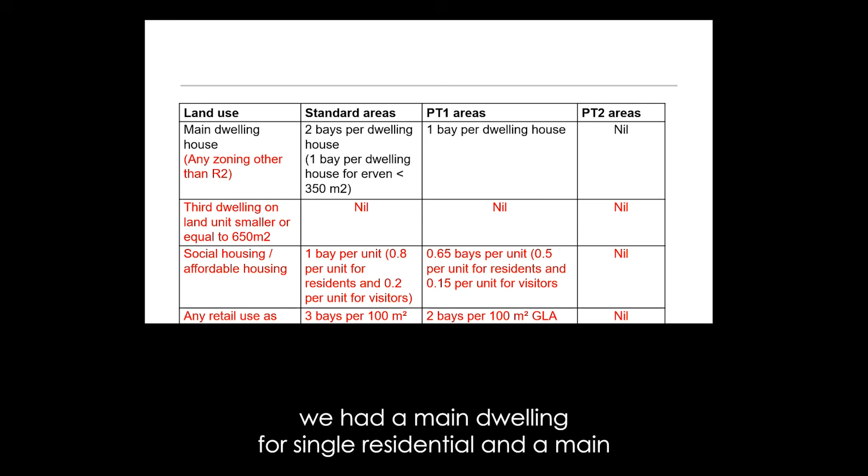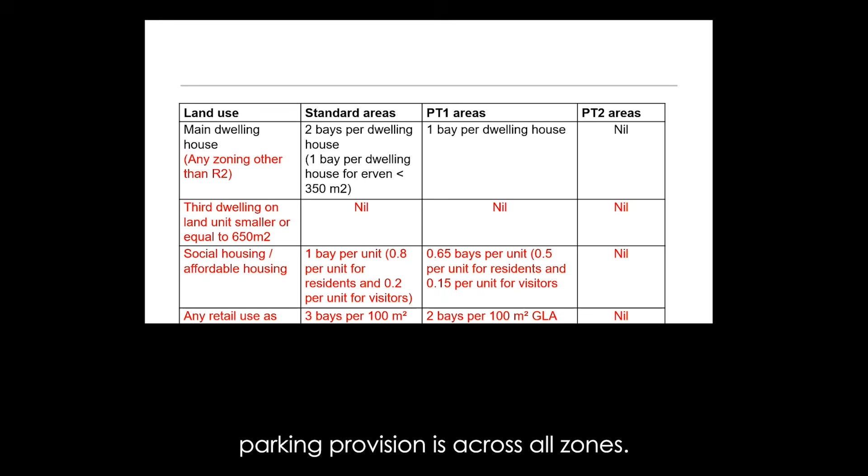Our parking provisions - I see we've got quite a few parking questions. What's shown in red are the changes to the parking provisions; everything else remains the same. One of the big changes is that previously we had a main dwelling parking provision for single residential, residential 1, and residential 2 separately. Those were the only parking provisions supplied for main dwellings. We've now changed that so the main dwelling house parking provision applies across the board for all zones, and then any other zoning than R2. Previously it was only for R1 and R2.

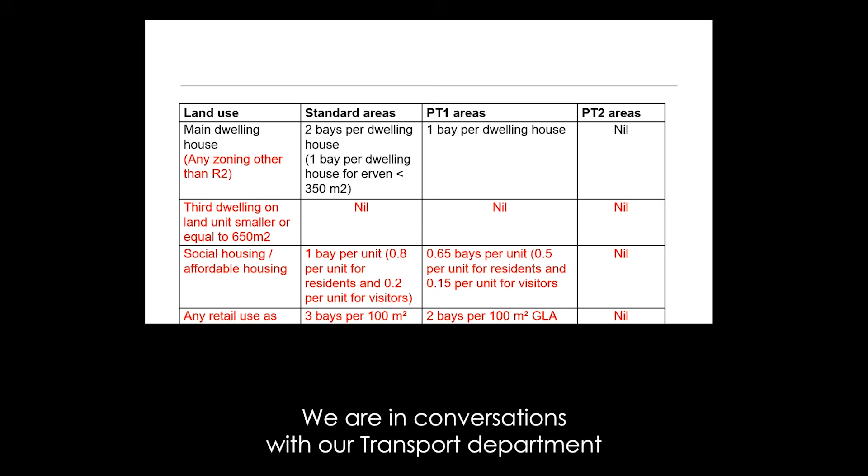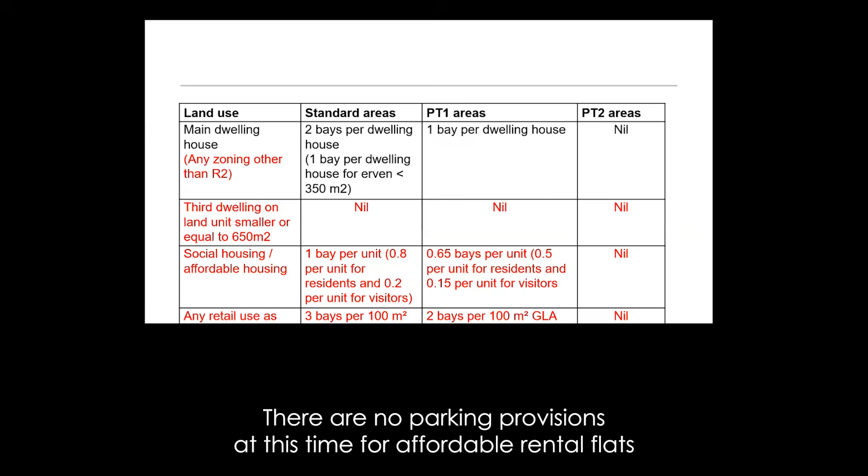So Cindy, to answer your question again: is there an additional parking requirement relating to the proposed affordable rental flats? No, there are no parking provisions at this time for affordable rental flats and affordable rental units. The social housing and affordable housing provision does not apply to affordable rental units.

This is just, again, a high-level overview of the incentive overlay zone and what it's introducing. Items 155 and 165 are the items relating to the new incentive overlay zoning.

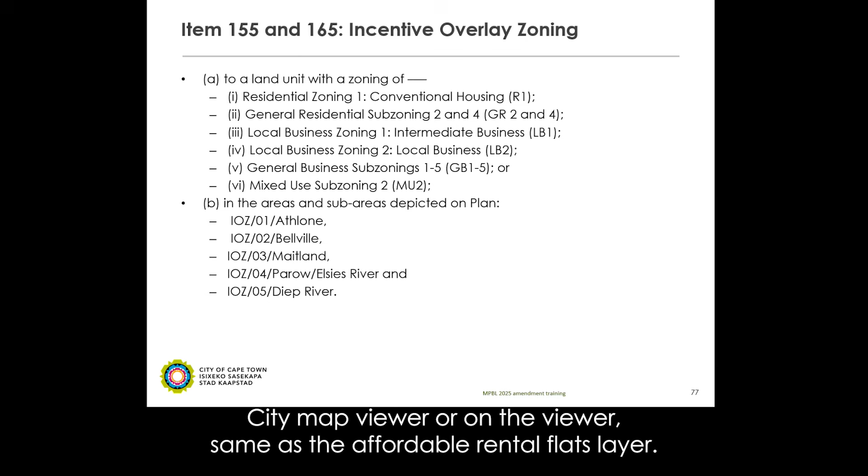So section 155A speaks to a land unit within a zoning, and it speaks to the different zoning categories that can be used within the incentive overlay zone, as well as there needing to be those zonings within the areas depicted on a plan. These plans have been advertised and the people affected have been notified. There are 5 different areas identified as incentive overlay zoning recipients: one in Athlone, one in Bellville, one in Maitland, one in Parow, and one in Diep River. If you're within the zones shown, and within the plan depicting that you're within the incentive overlay zone, then the incentive applies to you. Again, these maps are on our city map viewer, same as the affordable rental flats layer, and they can be seen there.

So 156B then speaks to the use of the property. If you are within the incentive overlay area and you have the different zoning, that zoning then has a corresponding increase or incentive, so different uses for each zone. For residential zoning, your increase in incentive is that you can now have a house shop, guest house, bed and breakfast, and then consent uses are place of assembly and hotel. So it's an incentive to be in that area, and it's an increased use right. Same with general residential and local business - you can see the use rights have increased in intensity and scale for those zones.

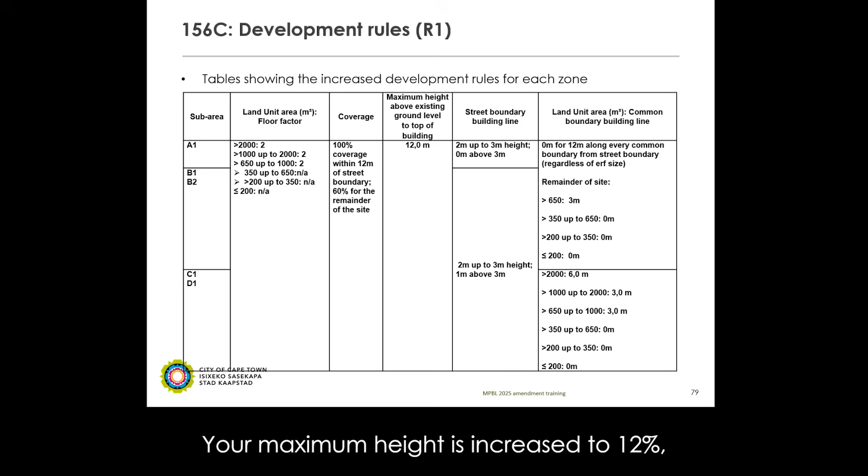156C then speaks to the development rules for each of the zones. If you're identified within this incentive overlay zone, you have increased or more relaxed development rules, so you can use your property to a greater extent. You can see in the residential 1 zoning, the coverage has increased to 100%, your maximum height has increased to 12 meters, your street building line has gone down to 2 meters, etc. So the development rules have given you an incentive to be in that incentive area.

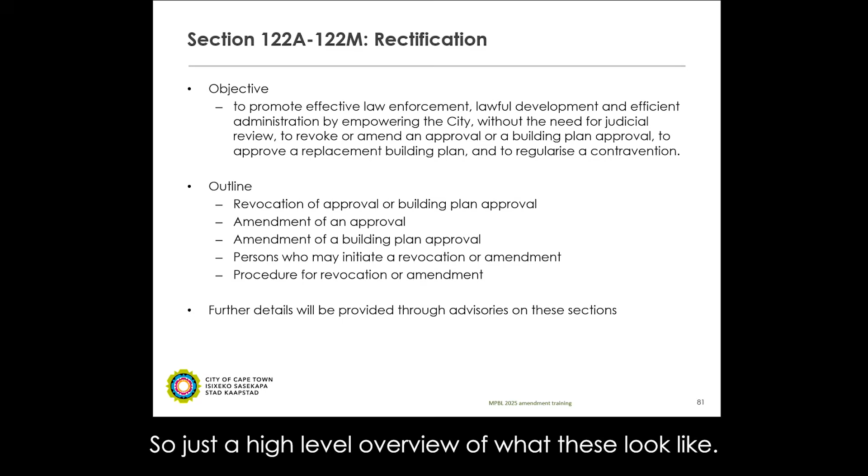So just our last section that we're going to touch on is our enforcement enhancements. We spoke about this previously in the beginning of the presentation, in that the rectification or revocation as well as impoundment provisions have been included. Just a high-level overview of what these look like.

Our sections 122A to 122M speak to rectification, and the objective of this is to promote effective law enforcement, lawful development, and efficient administration by empowering the city without the need for judicial review. This is to revoke or amend an approved building plan, to approve a replacement building plan, and to regularize a contravention. The outline within this section looks at the revocation of an approved building plan, approval of an approved building plan, the amendment of an approved building plan, the amendment of an approval, who can initiate the revocation or amendment, and the procedure for the revocation.

As we said earlier, this has to follow a full procedure, outlined in section 122. This is something that will be getting further advisories, and these advisories will be posted on our plan and build it right, and posted to the industry. But further details will come through advisories.